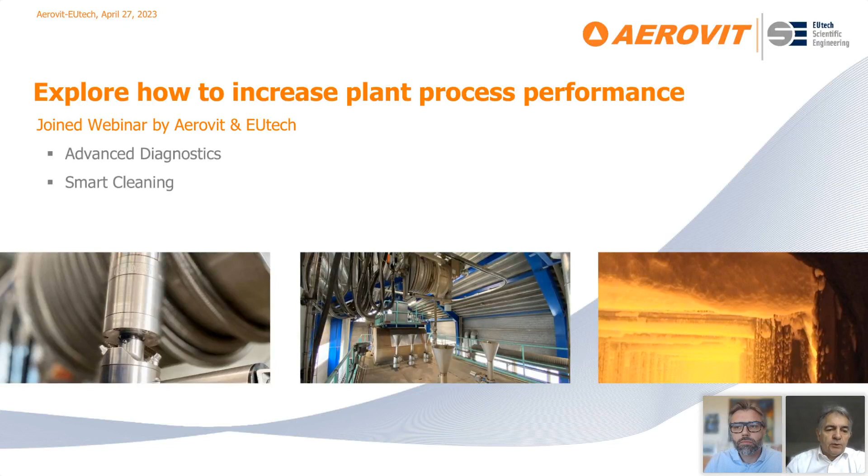My name is Michael Haug. I'm the Managing Director of EUtech Scientific Engineering. We are in the power plant business since our founding in 1999. Before that, we had a thermodynamic background, combustion engineers. We are providing engineering service, analytics, have developed diagnostics and software solutions to diagnose and optimize the combustion process, not only in coal-fired plants, but also in all kinds of fuels, all types of firing systems. So we have gathered great experience, and we want to share one part of this experience today.

And with me today is our colleague from Aerovit. Hello, my name is Søren Jørgensen, and I'm the managing director of Aerovit. Thank you all for joining today. We've been in the boiler cleaning solutions business since 1992.

Today we will talk mostly about shower cleaning solutions for the empty passes on almost any kind of boiler you have, where you have those empty passes - can be biomass, waste to energy, coal-fired boilers, and so on. We can also supply solutions with steam soot blowers for the superheaters, rapping as well if necessary. And also for smaller boilers, we have a cleaning system which is driven by compressed air, where we're sending shock waves that travel through the fire tube boilers. So this was a little bit about the Aerovit solutions.

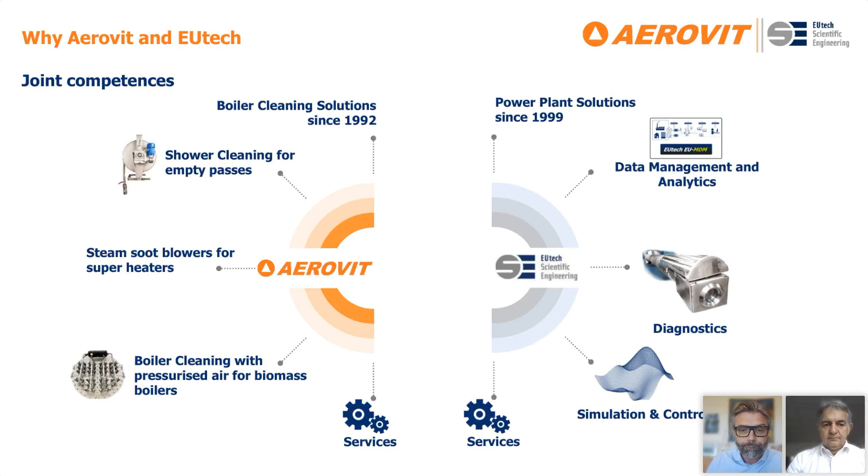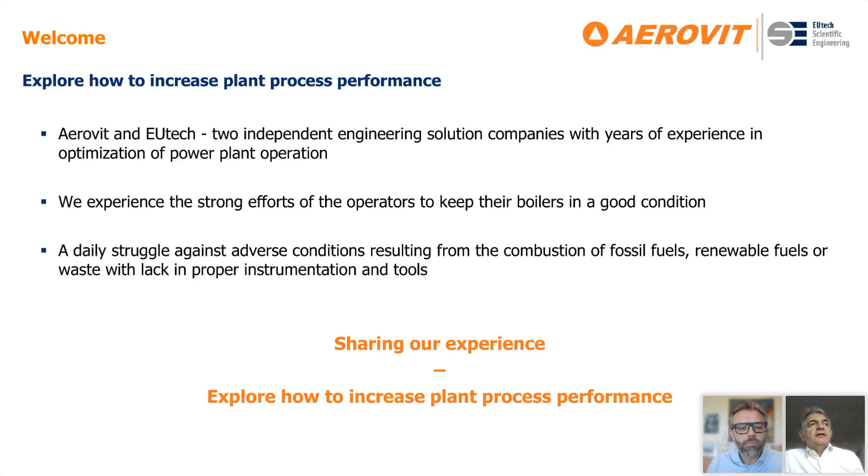So if we look a little bit more into what you will see today - Aerovit and EUtech are engineering companies, and we help our customers, the end customers who are operating the plants, to solve their problems over the years. We develop solutions which work 24/7, helping them improve and make boiler operation, make life easy. And we see that you are all in the field taking great efforts to keep your boilers in good shape, keep your assets at a very high level.

But of course, you're fighting and struggling day by day against the adverse conditions resulting from the fuel - fossil fuels, renewable or waste - with many different issues, and with a lack of proper instrumentation and tools. We want to share our experience today and show you how you can maintain and improve your operation. When we look into the process, you are familiar with these processes much better than we are in total, but you face problems with fluctuating heating values, with fuel quality problems. You have to balance the air-fuel ratio properly. You have to maintain high quality ash with low unburned fuel, and you fight against imbalances which make it difficult to operate your DeNOx, which may cause high temperature corrosion, fouling, or slagging. This is a very severe issue because it affects efficiency, performance, availability, and maintenance costs.

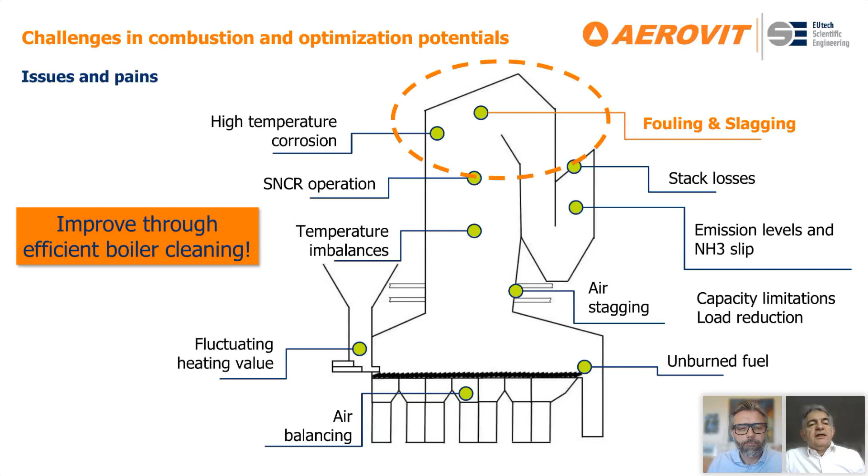So the costs and the availability of your plant are strongly affected by the cleanliness of your furnace. And what can you do about it? How can you keep your boiler in good shape? That is what we want to show you in our webinar in more detail.

First of all, it is important to understand the situation. You drive your plant by global numbers - some temperature values, input data, output data, emissions, and so on. But this will not give you the whole picture in detail. The monitoring, analysis, and root cause investigation is a very important part of the whole process to keep it all the time in good shape.

Because when it starts sooting and fouling, sometimes it's too late, because there's a build-up in the process which you can't stop so quickly due to the circumstances, and you're not aware of it. There is a delay in noticing what is going on in the furnace because there is no instrumentation there. So the classification, the analysis of the process, and the classification of the urgency and severeness of slagging and fouling - that is an important part because it tells you when it is the right time to act.

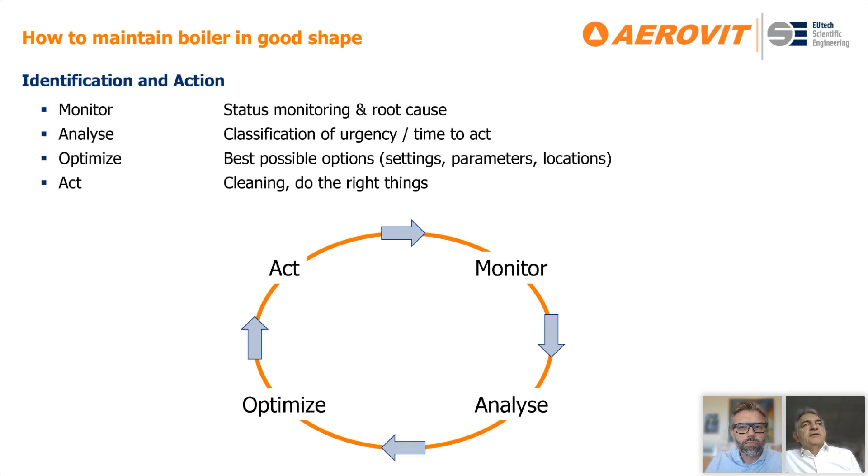Based on the cleaning process, and cleaning in time is very important, you can optimize your complete strategies, and depending on the cleaning situation, you can advise cleaning or assess cleanliness of your pendant section. You can make decisions about the cleaning process. So what we are applying are high definition cameras, fully digital and fully automated.

They are designed to withstand the severe conditions in the furnace, and with digital image transfer, we have no loss of information. We are past video; we are now using state-of-the-art technologies, and we apply advanced image processing for smart identification and quantification of sooting. Sooting is not only deposit, but also a question of structure and texture of the material—is it loose sintered material, is it a slag flow? Based on this, we can initiate the cleaning process.

To give you an impression, I have a short video sequence which shows you how quickly this process can happen inside the furnace, unnoticed.

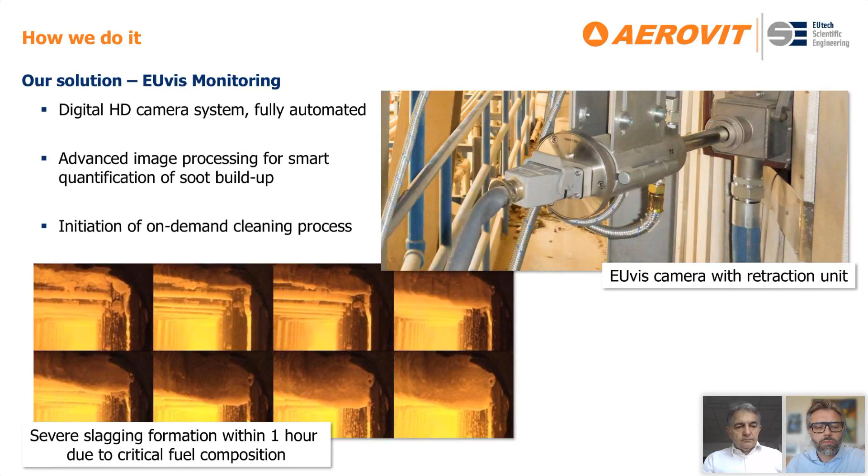So what we do is define regions of interest, critical areas, which are monitored continuously by the image processing. By this, we can quantify in separate areas the process of sooting and slagging. We also use artificial intelligence to identify if it's dangerous or not, if it's strong buildup or low buildup, if it's clean, or if some action is necessary.

This sequence shows you different types of situations: medium, clean, and this is a process where we have almost medium—some parts are dirty, some parts are clean—and this is a severe, strong situation. This is identified by the software.

This identification allows us to stipulate or ask the cleaning device that this area needs cleaning, and then you can show us how it will be taken over. I will do so.

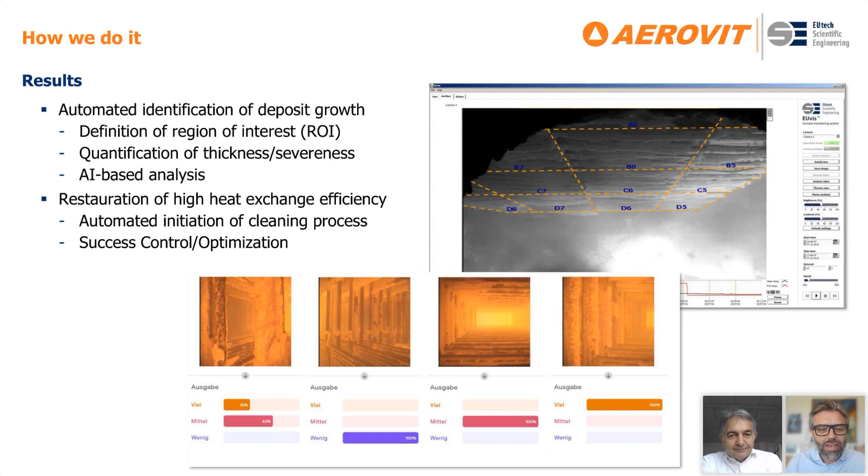First of all, when you have realized that you have issues with fouling, either by temperature or by using a camera like the EUvis camera, you can choose a solution like the Aerovit SC Jet. It is a fully automated solution for cleaning the boiler walls with a patented nozzle that can go either clockwise or counterclockwise, so you are sure you reach all the areas of the cleaning parts.

As I said earlier, you can activate it either during boiler performance if you see the temperatures getting too high, or you can run it with a schedule. You can plan to clean every 12 hours, every second day, and so on, and choose which holes you want to activate the cleaning in.

Or you can adapt the cleaning sequence according to EUvis monitoring diagnosis that Mr. Haug showed you earlier. That's where the two companies have synergy together—if you realize the issues visually, you'll more easily be able to make the cleaning with the SC Jet, only putting water at the areas where fouling is actually happening, not spraying water and putting stress on surfaces where it's not necessary. This also gives you a minimum amount of water inside the boiler, because it's used only when necessary.

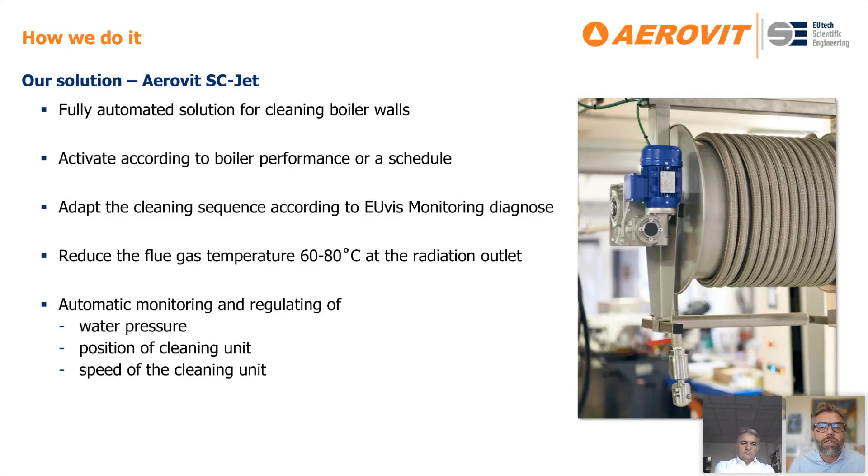I'll start by showing a video also that shows a cleaning sequence where you'll see the nozzle, which is here in the center of the slide. This one rotates in only one direction, going counterclockwise.

You will see the droplets hitting the surfaces and evaporate instantly, so you will not have water running down the heating surfaces.

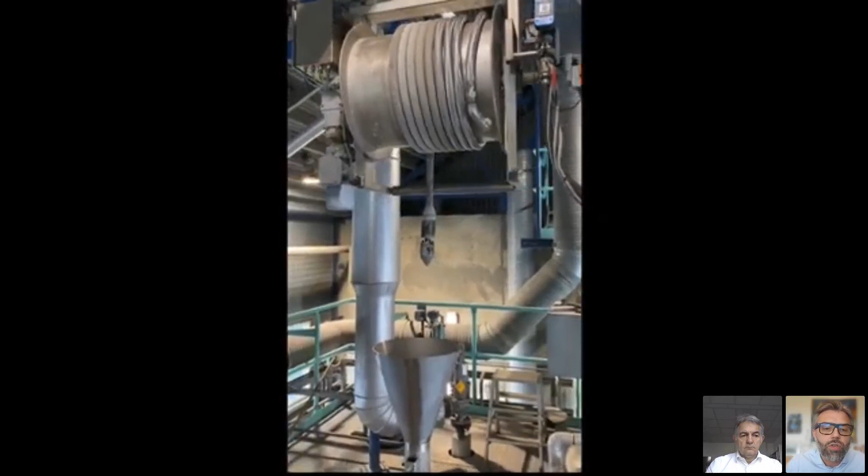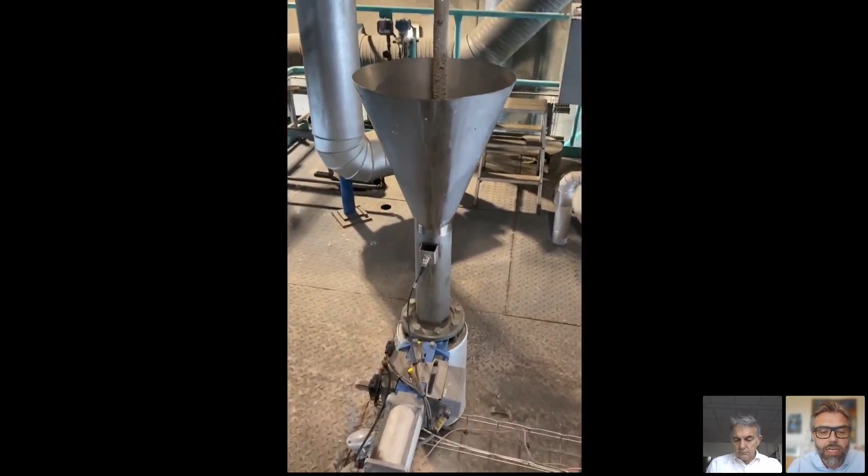Here you see the drum going over to hole number 1. This is activated directly from the control room. When the nozzle is lowered into position, the sensors realize the nozzle is there and the gate valve opens.

And the nozzle is lowered into the empty passes. I can see here the drum is micro-compensating to make sure to put a minimum stress on the hose. So it's lowered directly into the conical structure.

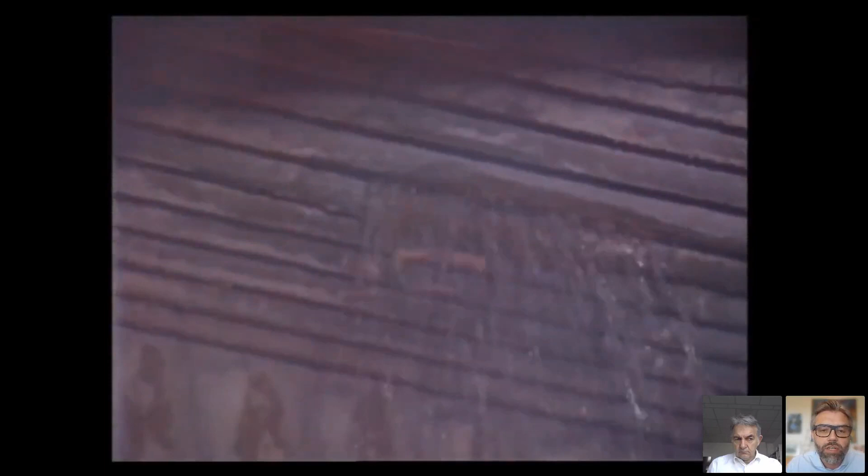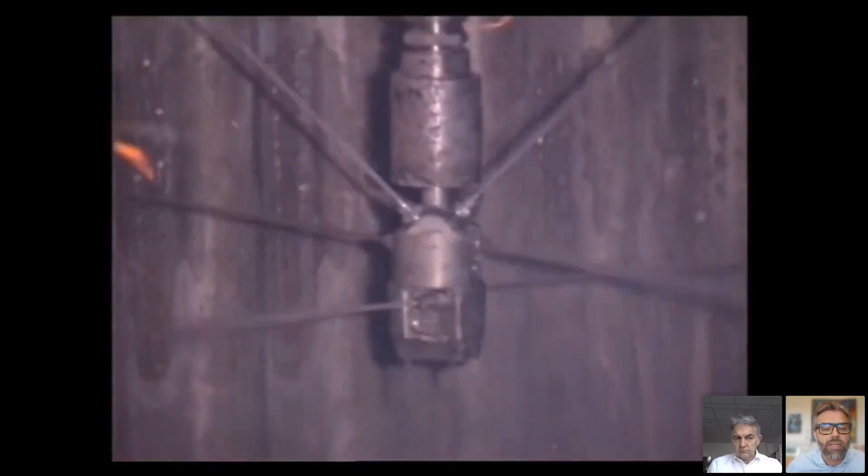Here we're looking in from the bottom, where we see the nozzle coming in. There are 6 nozzles spraying the water in different directions, and as you see, it's only like 30 to 40 centimeters that is actually water, and it evaporates instantly.

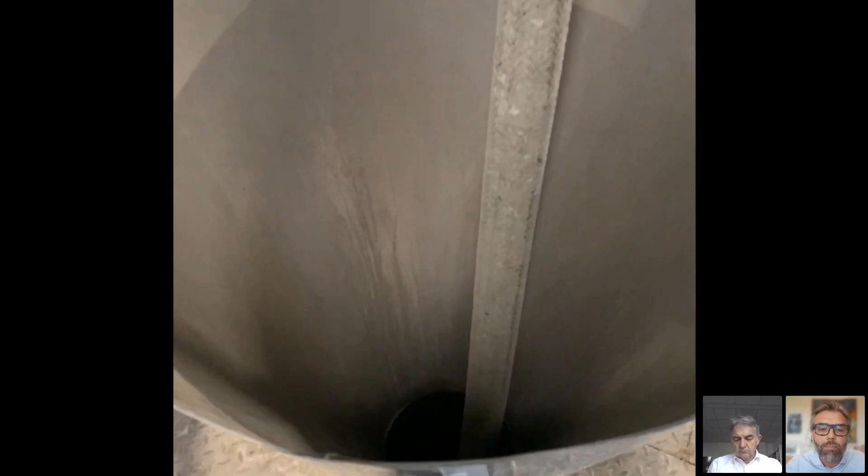When it's going down to the set point where it's lowered, it returns back up, everything fully automatically. And when it comes up here again, the water you're spraying is also the cleaning element.

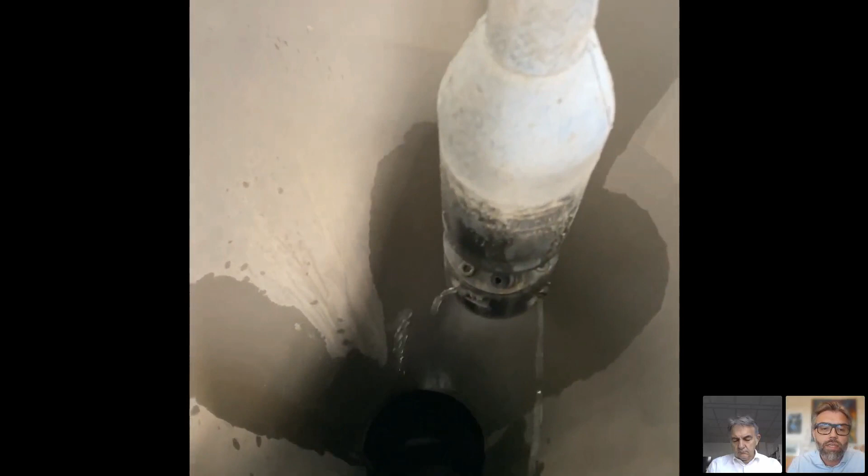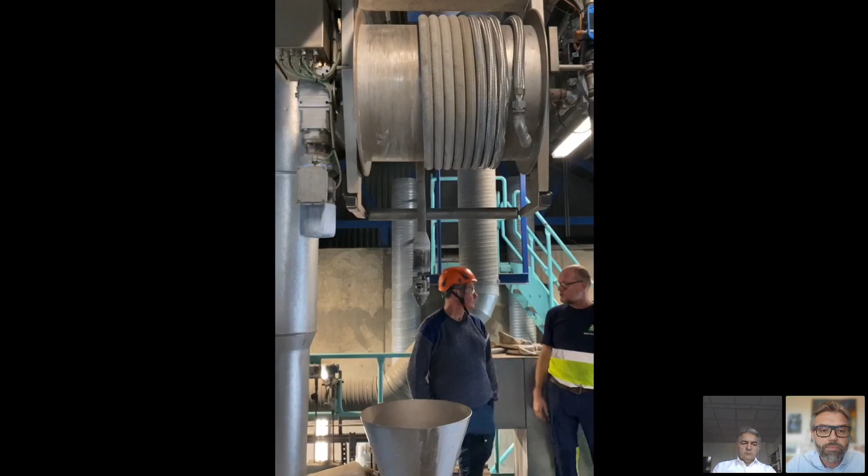As you see here, it doesn't rotate, but it's actually just cooling, because the operator doesn't want to clean at the top of the boiler part. When it's stripped off, it rolls back up the hose and goes back into park position.

So when you've done this cleaning, and you do it regularly according to either temperature or by visually realizing the issues, you'll have a much higher boiler availability. You'll be able to run - we have many cases where they run a full year without any stoppage.

But due to the patented nozzle head of Aerovit, we have a minimum amount of inlets in the boiler roof, because the water droplets are sent more than 5 meters to each side of the nozzle head. So the fewer inlets give you full coverage, but still the smallest amount of water inside the boiler.

When you have a fully automatic system, you have low maintenance costs. The nozzle head from Aerovit can be renovated, so it's a one-time purchase.

Since it's going into a harsh environment, when it's been worn and tear over time, you can send it directly to us, and we can renovate the nozzle heads. Then they are fully operated and tested in our workshop, and we will send it back within 1 or 2 days, to have a nozzle head available all the time at the plant.

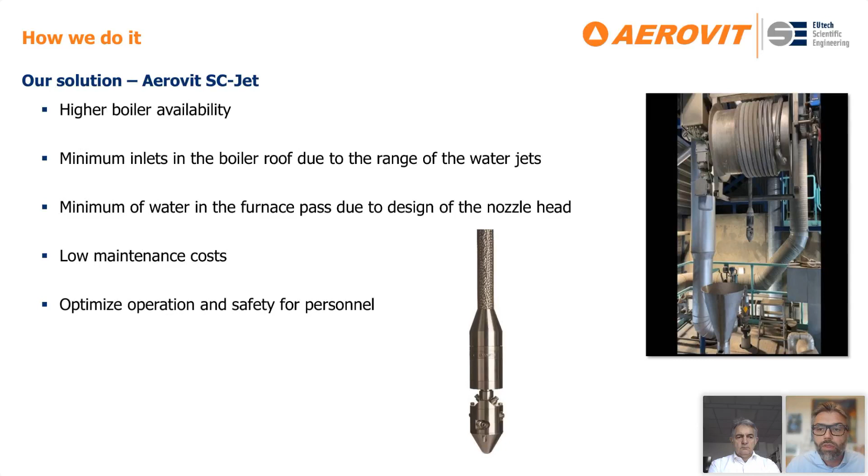So this was a little bit about the Aerovit SC Jet solution, where after you realize the issues, either by the UV camera or with the boiler temperature, you can actually clean the areas where you want to clean. And this is, again, as I said before, the synergy between EUtech and Aerovit comes in. Back to you, Michael.

You need to turn on the microphone again. I always forget. Thank you.

I hope that you saw some important information, helpful information for you, on how to identify the ways of identifying the critical areas and continuously monitoring them. We have great experience with this, and also, more importantly, to determine the severeness, the quality of the slagging, because there are always deposits on the piping, but if there is a necessity to clean, this is the important question, and we have an answer on this.

And you saw a very effective way of cleaning by the SC Jet. Based on these tools, you can adapt and optimize your cleaning strategy depending on change of fuels, change of the properties of slagging and fouling, and we hope that we could bring you some helpful information.